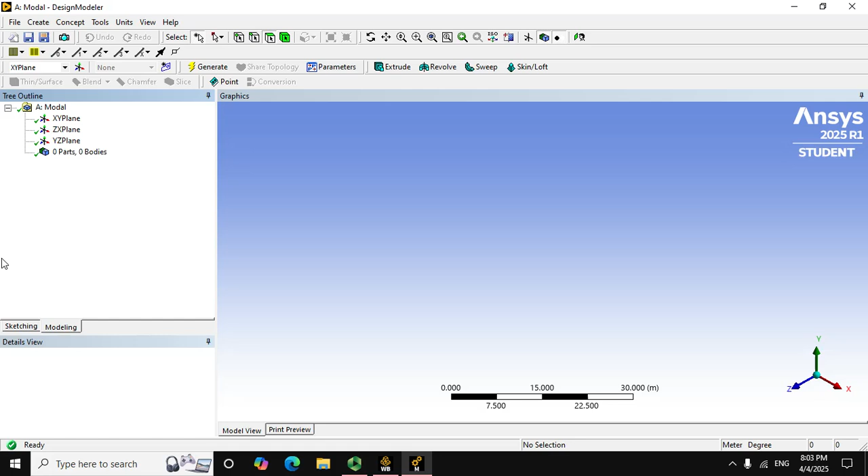Alright, so we go here, and now let's zoom in. Okay, so we need to do a circle in the XY plane. I'm gonna have this circle have a diameter of 0.5. So this has 0.5 diameter.

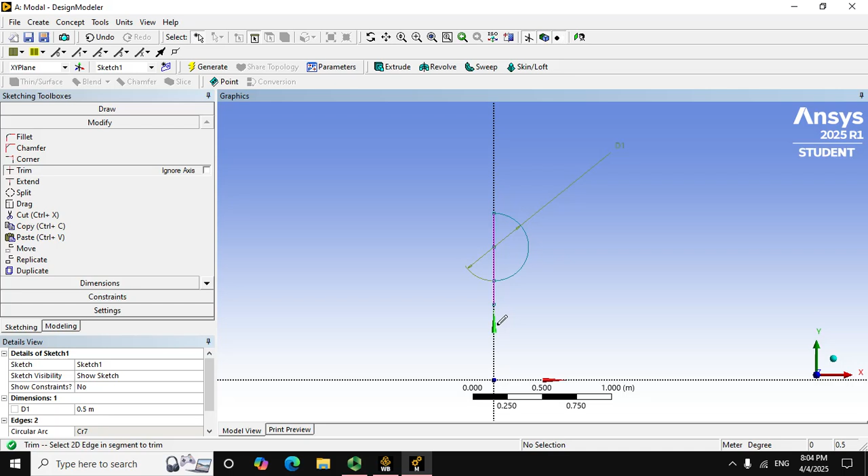Alright, and then let's go to front view, and we draw a line, and then we trim away the parts I don't need, like this, this, and this. And now to make the sphere, I'm gonna revolve this.

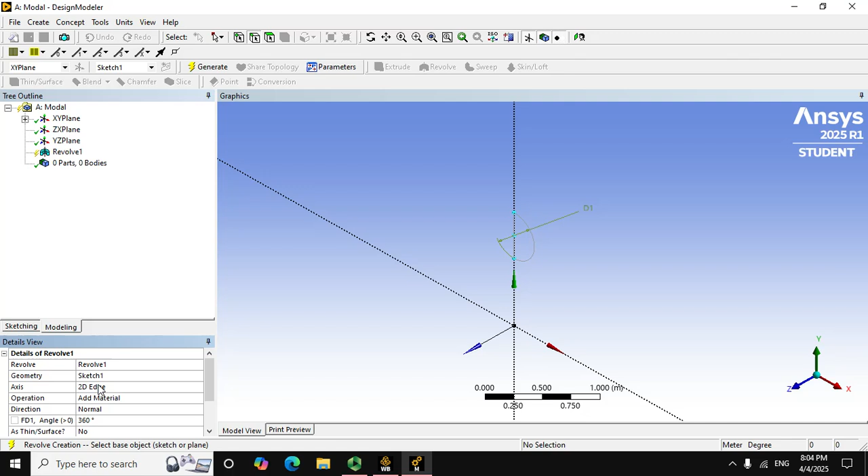Alright, so for the axis, I can pick this guy. If I say generate, now we have a sphere body. Okay, so now close this. That is gonna act as our mass in our system. I'm gonna add a spring.

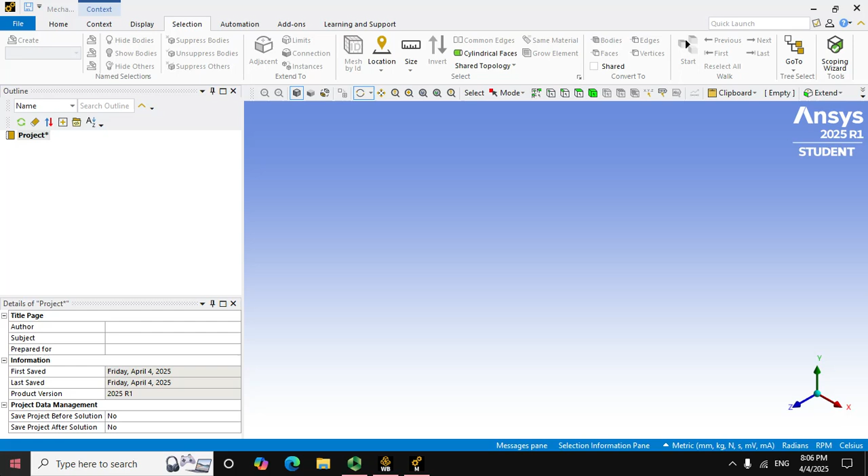Alright, so let's see. We have to wait until it opens. You have to wait until the design tree is updated. Okay, now I'm gonna go here and add a spring.

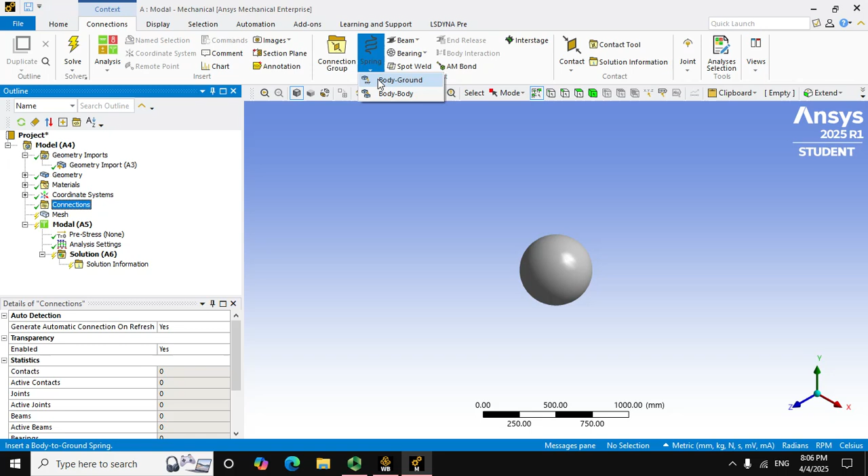I'm gonna connect this mass to the ground using a spring. So you have to click on this. And then for the stiffness, I'm gonna consider 2 million. Okay, 2 million Newton per millimeter or kilonewton per meter.

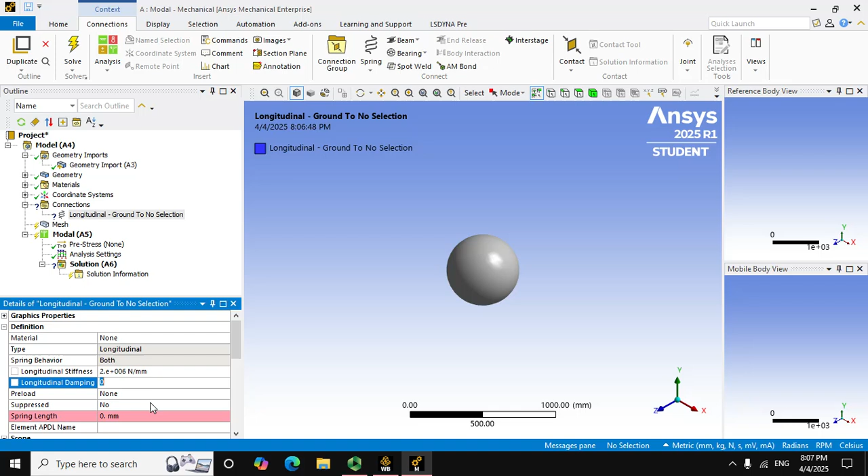And for here, let's see how much damping I'm gonna consider. Let's consider 63,000. If I consider 63,000, what happens? Oh, let's say 100,000. Alright, so this is our damping.

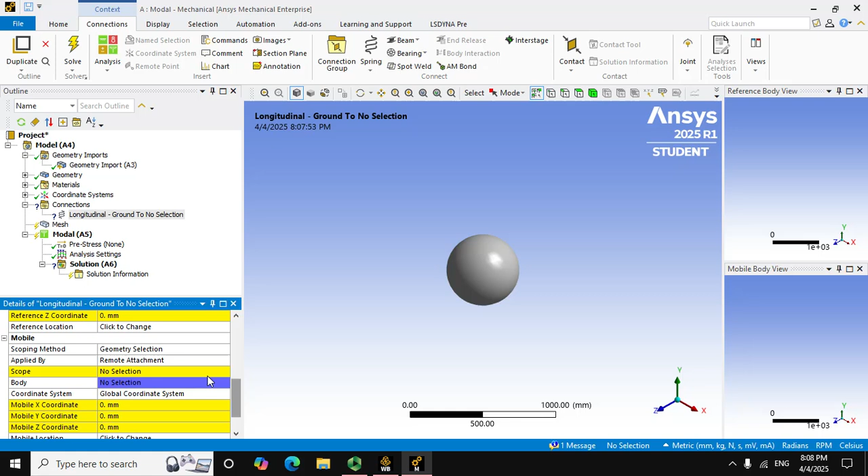And we're gonna connect this mass to the ground. So we pick this and connect it to ground. So now it's connected. So we can mesh this model, generate mesh, and then solve it to find the mode shapes and natural frequencies.

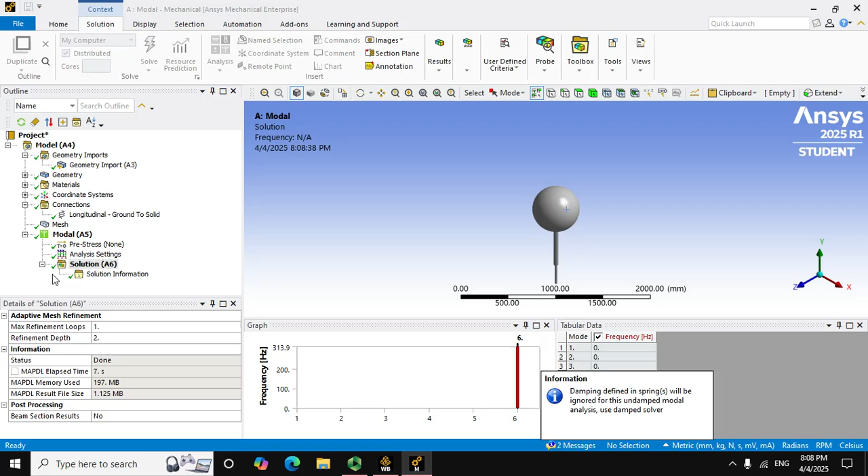This is a single degree of freedom system. Technically we should have one, but you're gonna see here that we have multiple solutions. Some of them are rigid body motions; they're like fake natural frequencies. Let me show you the mode shapes, all of them. You're gonna see some of them are rigid body motion, so they are not vibrational mode shapes. Look at this one, for example.

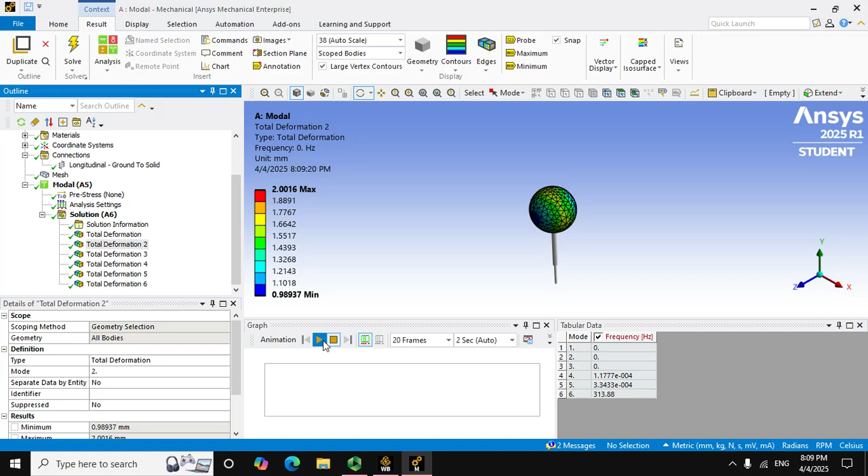In order to eliminate these, we can forcefully limit the motion to the XY plane and along Y. To do that, you come here, say insert, then displacement, and I'm gonna limit displacement in the X direction and also in the Z direction. And for geometry, I'm gonna just pick everything.

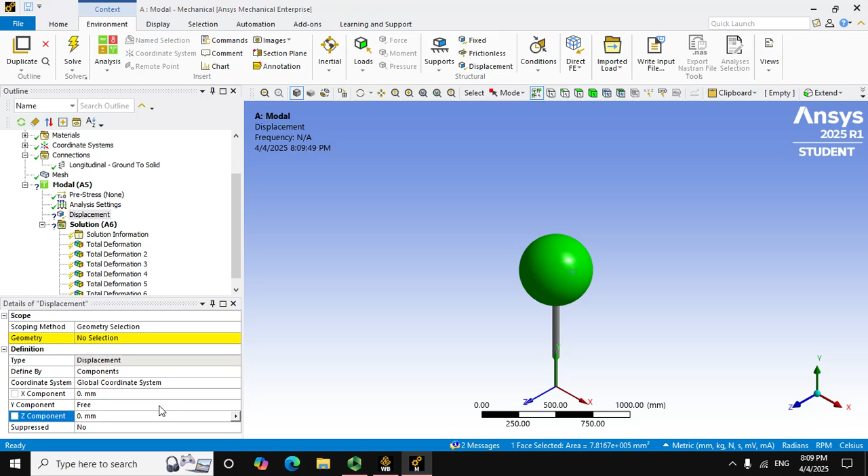So now let's see what happens. If I repeat the solution, you're gonna see those close to zero or zero natural frequencies are eliminated. Now the first one is the one we wanted to find, the relevant one. The other ones are like junk. This one is what we expect to see for a single degree of freedom system.

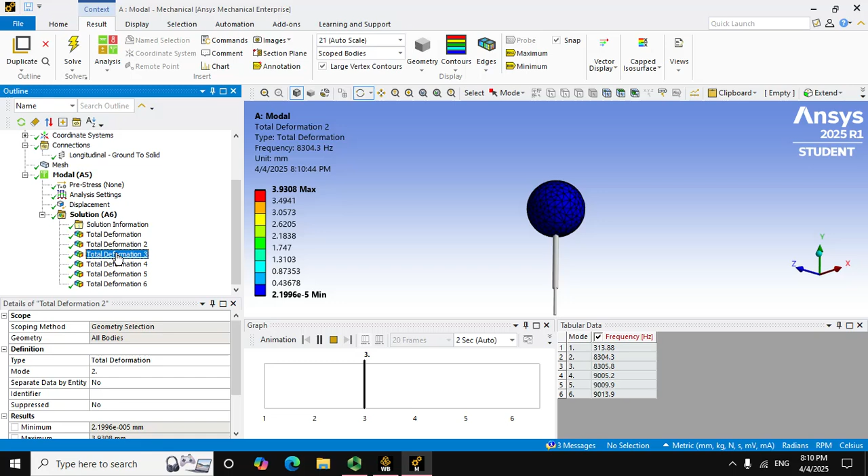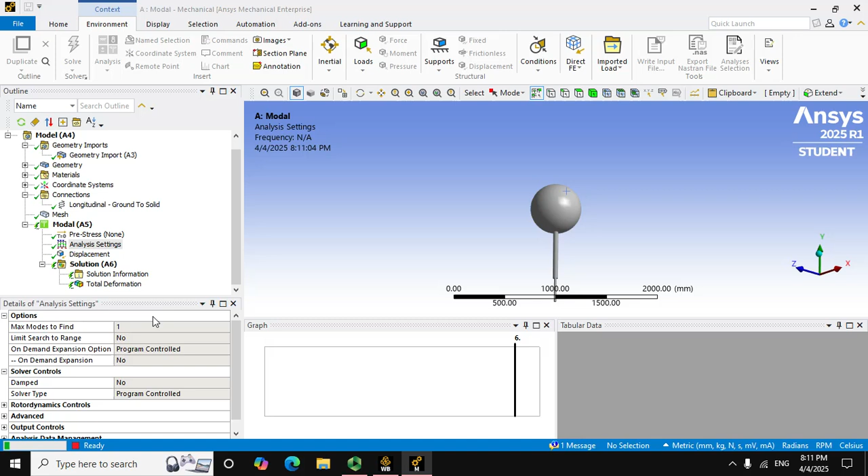The other ones, it looks like these are not right. We just need the first one, so I'm gonna eliminate these and delete those. You can just say find one mode shape here. Then you're just gonna get the only mode shape that is relevant to our work. Alright, so that's the mode shape.

Next I want to show you how we can find frequency response. You come here to analysis, and then harmonic response. Then analysis settings, where you define the domain of your frequency response analysis. My natural frequency was 300, so I'm gonna do it from 200 to 800. Solution intervals is like the resolution, so let's do 600. And then I'm gonna output frequency response of the deformation.

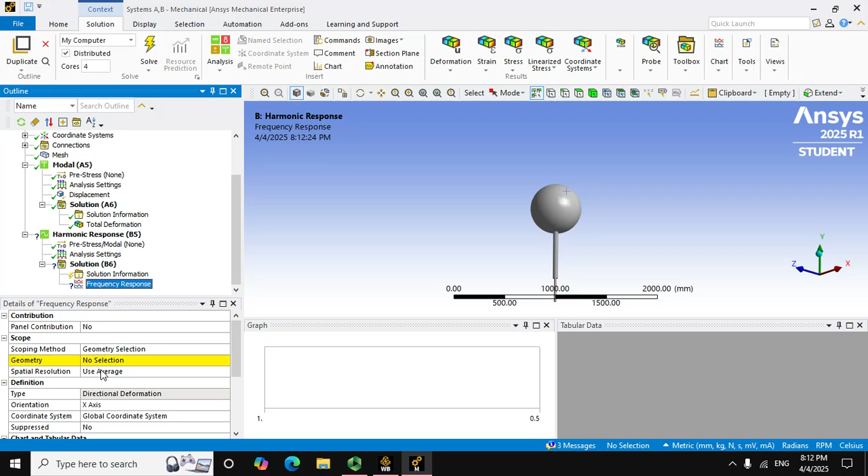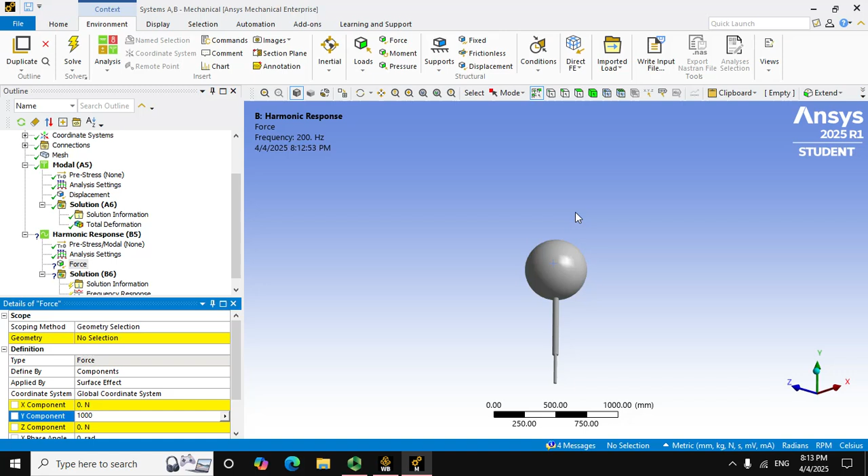It asks what geometry you are interested in finding frequency response for. You click on this and select that face. And by the way, frequency response analysis needs a force, so we need to know what force and what point you apply it to. Component, in the Y direction. The magnitude really doesn't matter, so it's 1,000, applied to this guy. So now let's run it.

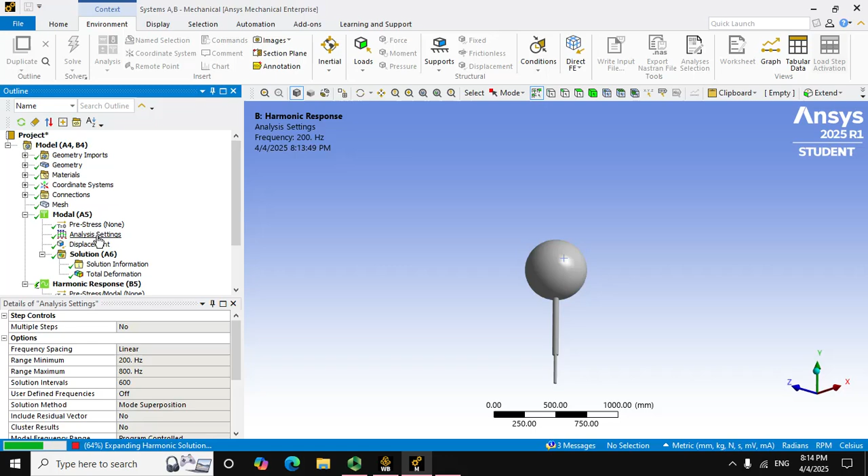Alright, so let's see. It's coming. Alright, so it's coming. So you see, depending on the resolution here and the range, it's gonna take longer time. If you have very fine resolution and a wide range, it's gonna take longer time. And my laptop is not really top notch, it's not state of the art. So our natural frequency is 313, so we're gonna see a peak around that.

Alright, so let's see, 70% done, 73, 74, 77, alright, so getting close. Yeah, if you wanna see a smooth.

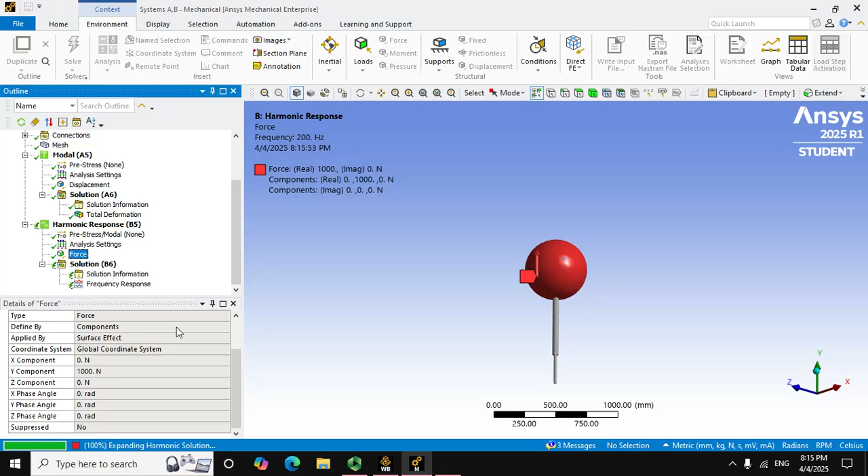Oh, by the way, the frequency response, I made one mistake. I should have had the deformation in Y direction, so we have to fix that. That's not going to be useful because it's in X direction. I forgot to adjust it because the one dimension that we are considering here is the Y direction. So yeah, okay. This is not what we're looking for.

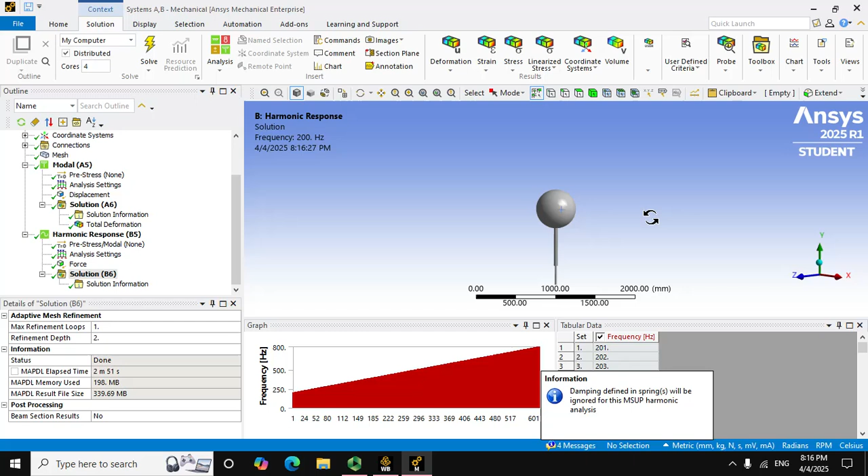So let me change this to, it's similar to what we're gonna see. Well, it's in Y direction, so everything, frequency response to deformation, must be done in Y direction. So let me come here, I have to fix it to Y. Alright, so let's see that. We gotta wait again. Oh, that one was quick this time. So it looks like the solution was done in all directions already, so that's why it was short.

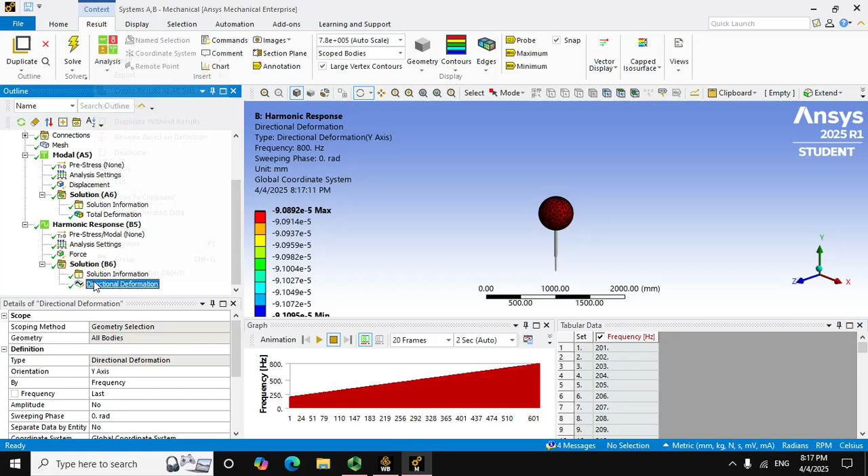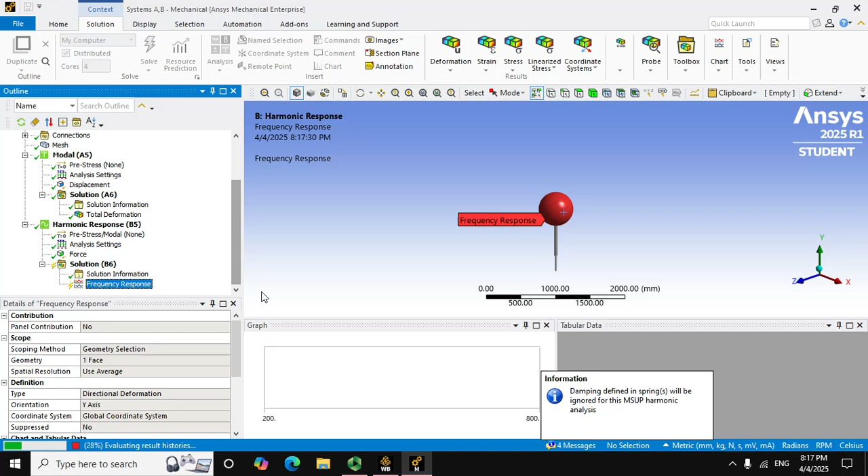Oh, no, I'm sorry, I made a mistake. Go here, insert, not deformation, we should see frequency response. Frequency response of deformation of the geometry. Y, and then right click, evaluate. Alright, this time it was done faster because the solution was done before. So let's look at it. This is the response, the amplitude, and here's the phase angle of the response function.

The phase angle tells us the phase difference between the input and output, and this one tells us the amplitude or the magnitude of the response. Alright, so this is how it is done. So I hope you guys found it useful. As you see, there is a peak at 313, around that point. And with my damping, this is the response. If you change the damping, the response is gonna change.

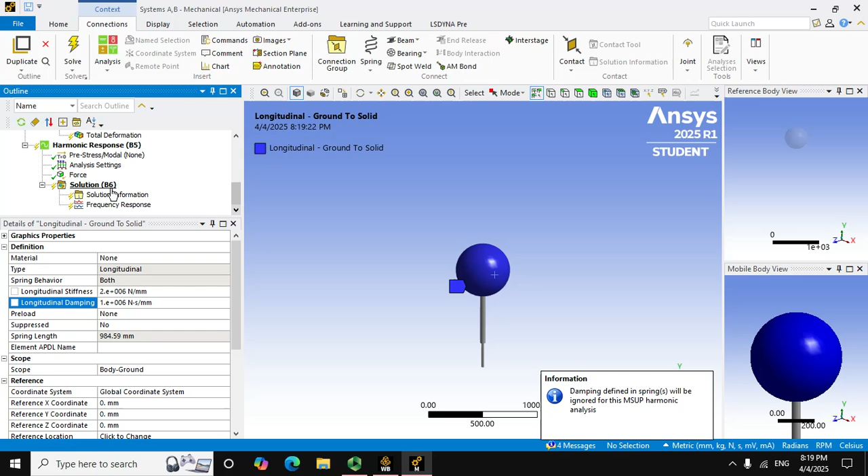So if you'd like to, you can play with the stiffness or the damping, and you see the change in the response. Okay, just one test I want to do. If I do it 1 million, for example, we made it 10 times larger damping. So let's see what happens to the response. So it's gonna need to do a fresh analysis. That's why it's gonna take longer time again.

Alright, so see if I can get the phase angle and the response. Let's see what happens. Our expectation is this curve to come down with larger damping. Smaller damping is gonna increase this peak here, and in theory if you have zero damping, you should have infinity here around the natural frequency. So let's see what we get. If you like, you can later make a similar model and play with that.

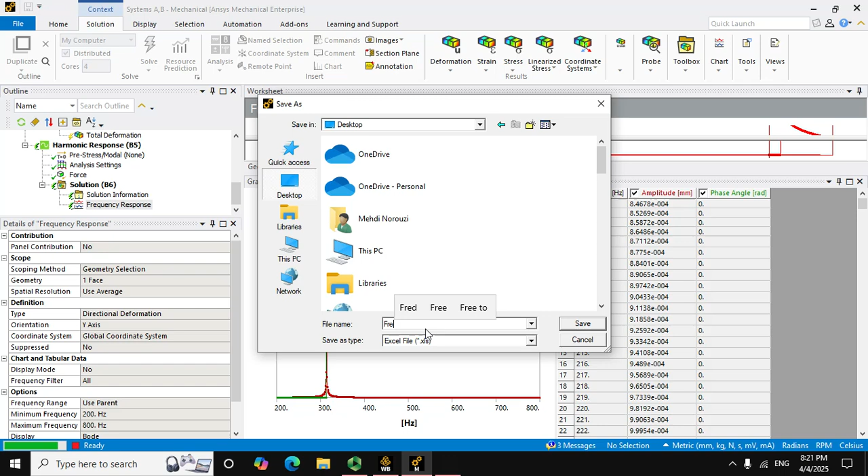By the way, there's a table here for amplitude and phase angle. This is actually the result in a table format. If you like, you can right click and export, and then take it to Excel and plot it yourself if you don't like the way ANSYS is plotting. So let me do it, frequency response XLS file, so we can save it, open it there and play. You see it's here, and you can plot it here.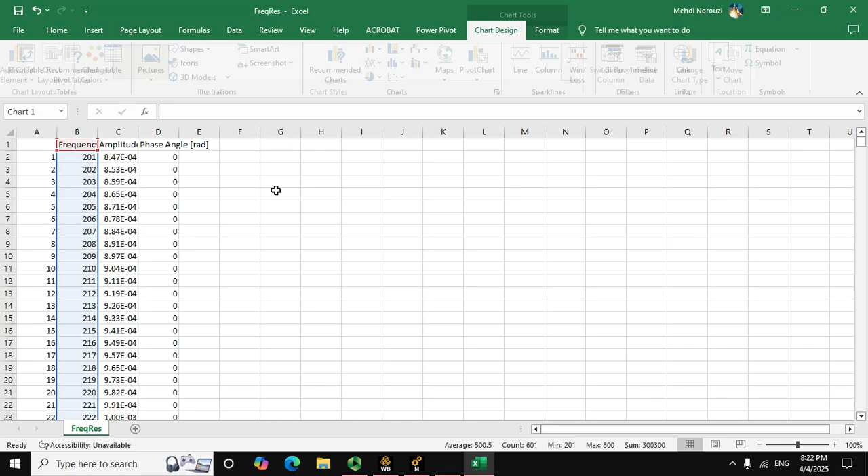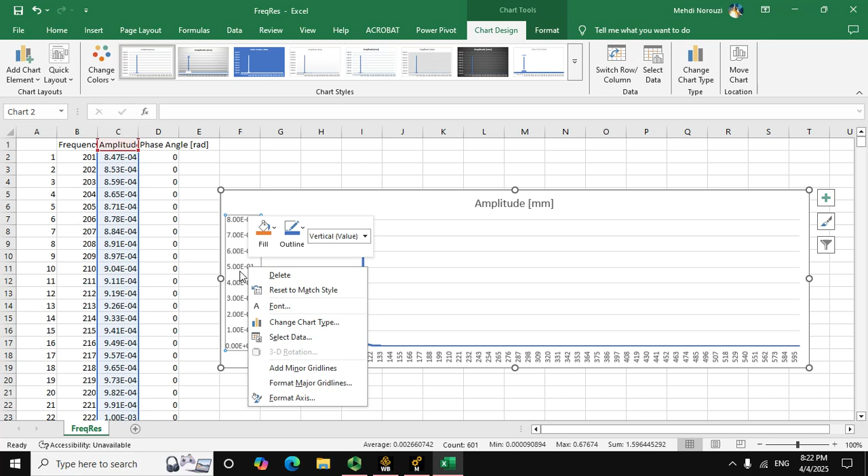This is the frequency, sorry. So the amplitude, if you want to do that, come here, there's the function. See, we have a peak around the natural frequency, and then it goes down. You need to make the axis log scale.

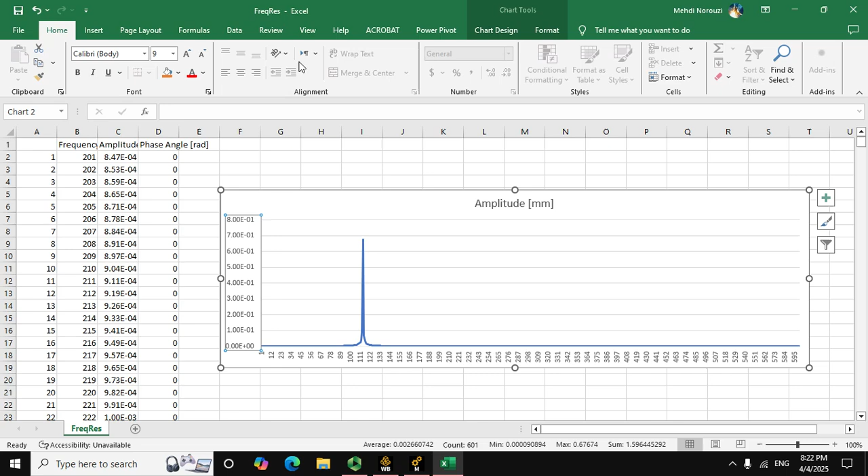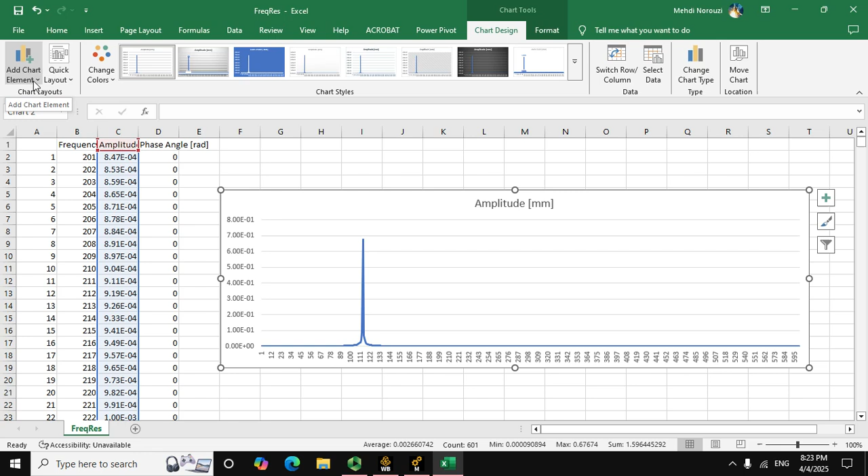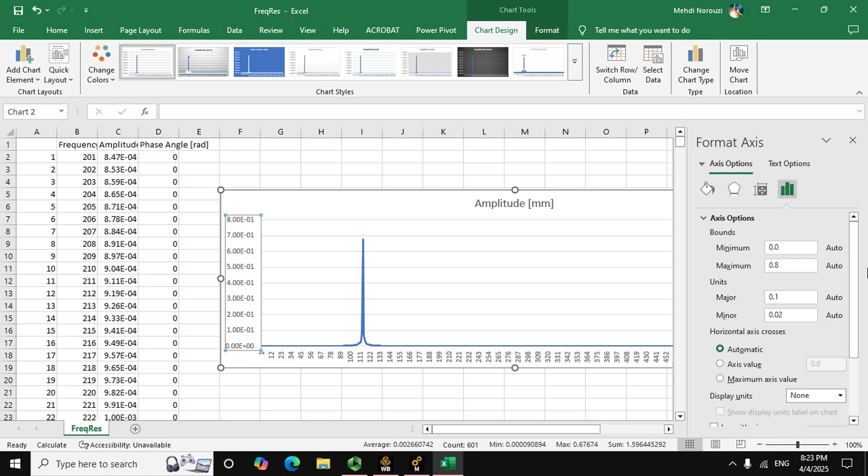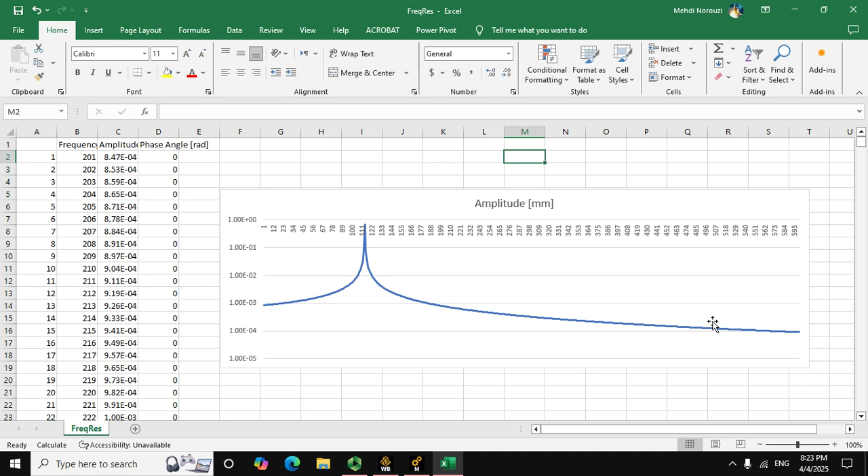Let me see how we could change this here. See if I remember where I could change these, chart design. Is it here? The axis, primary horizontal. Once you double click here, you should. Oh yeah, logarithmic scale is here. So if you do it in logarithmic scale, your curve, the frequency response function, is gonna look much nicer. Alright, so this is how you can do that.

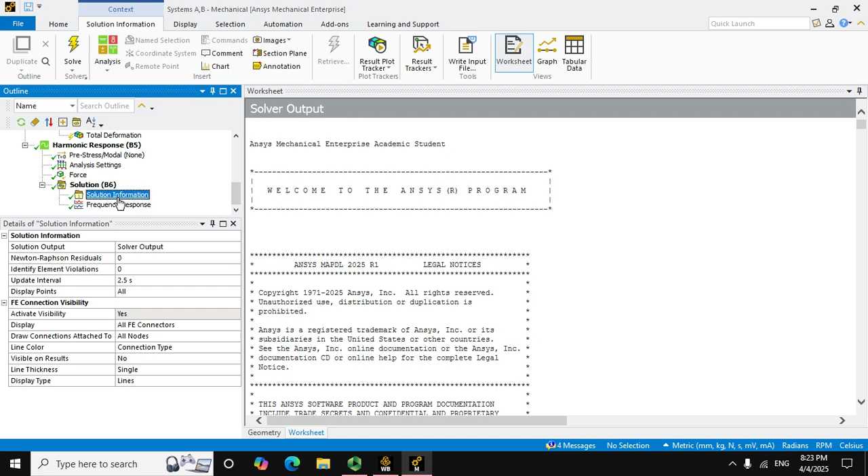You can export the result, as I said, to Excel, and here's my new result. Is it the new result? Seems like it. So probably with larger damping, that peak is gonna come down, that's what you're gonna get.

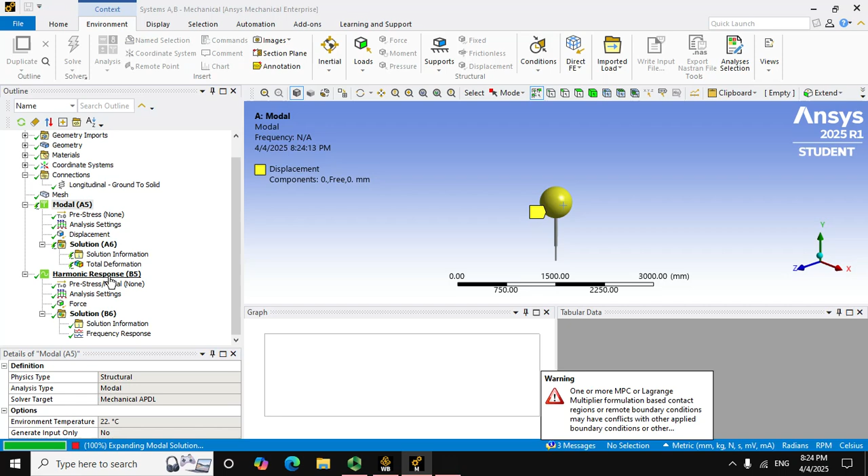Anyway, my main intention was to show you the process of finding frequency response. Oh, it looks like we need to refresh everything. So anyway, I just wanted to show you the process. I hope you find this video useful. Alright, so that's about it.